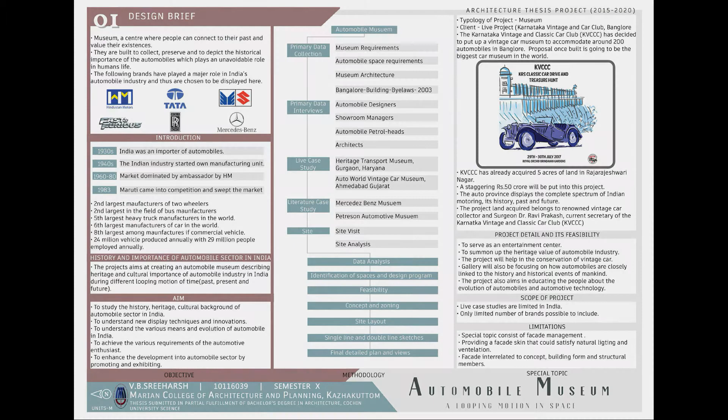Heritage Transport Museum, Haryana. The Heritage Transport Museum is located at Gurgaon, Haryana, in 3 acres of land. The building form consists of industrial era design.

Multiple levels were created at the ground level according to the site contour. The structural system is placed without obstructing views. The exposed column gives a feeling of the automobile industry.

Cutout slabs provided as a form of display technique and circulation. Electrical units are combined together for easy access. Outdoor HVAC units are placed on a raised plinth for dust and water resistance.

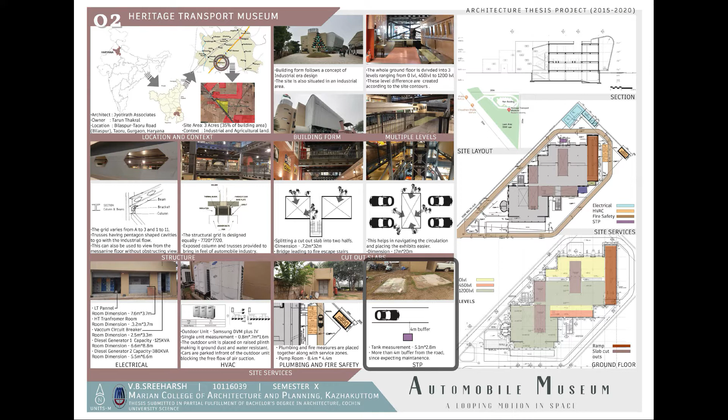Easy fire truck access to plumbing and fire escape room. The sewage treatment plant tank was placed 4 meters away from the service road for easy maintenance.

Here we can see different types of display techniques: parallel parking, 45-degree parking, mixed parking, floating island, and wheel cart exhibit.

The key factor in the museum is its circulation. There are some circulation movements that came to my notice in the museum.

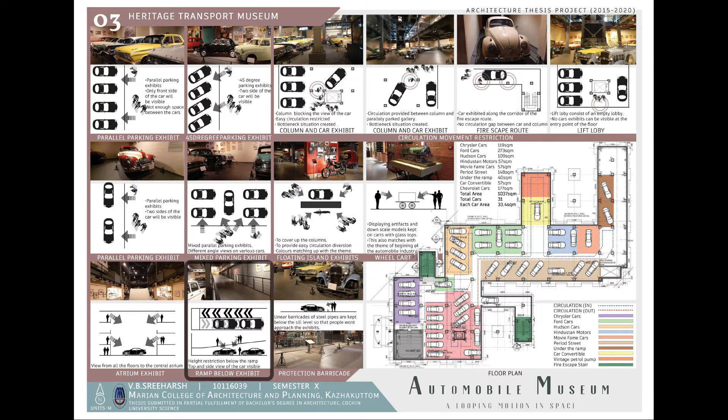Cutout slabs also helped in the formation of atrium spaces, thereby providing a bird's eye view of the exhibits. There is a height restriction below the ramp. Linear steel pipes are also provided as a protective barrier without blocking the view.

The total car display area is 1037 square meters, with an average of 33.4 square meters required for each car exhibit.

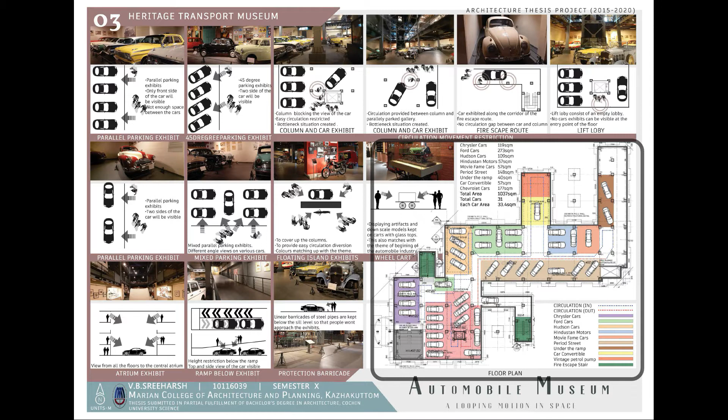Auto World Vintage Car Museum, Gujarat. It is located at Ahmedabad, Gujarat, in 3 acres of land.

There are main entry, secondary entry, and tertiary entry to the museum, which filter vehicular entry, parking, and visitor entry respectively. This 104-year-old fort was converted into a museum.

Aluminium roofing was added as a part of the conversion of the fort into a museum. Curtains are provided for shading, which block the view at the approach.

The display technique consists of 45-degree parking exhibits and mixed parking exhibits, which could only display either two sides of the car. The total car display area is 3,365 square meters, with an average of 37 square meters required for each car exhibit.

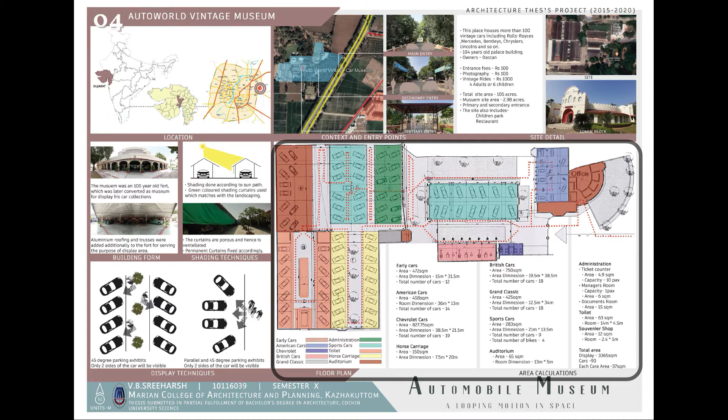Mercedes-Benz Museum, Germany. The Mercedes-Benz Museum is located at Stuttgart, Germany. The building form is based on the shape of Wankel engine components, which thus creates triangle atriums.

The display technique consists of centrifugal car display, which helps in viewing multiple cars from a single point of view, and display on ramps creating an ambience of the racetrack.

Vertical display on the wall where one can view the roof of the car, and finally, high-rise platforms suitable for central courtyard spaces.

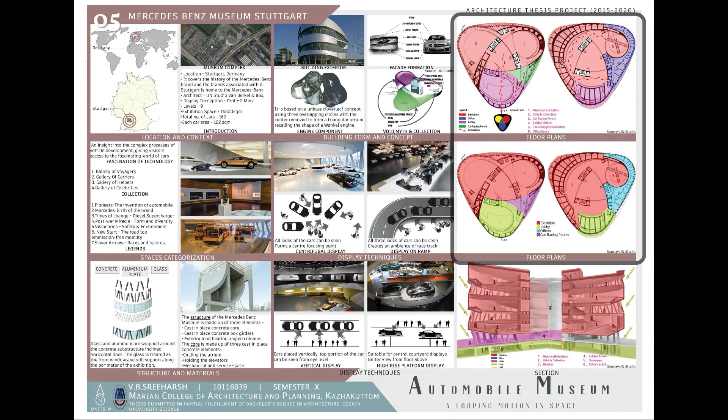Structure and materials include concrete, glass, and aluminum plates. The total car display area is 16,500 square meters, with an average of 102 square meters required for each car exhibit.

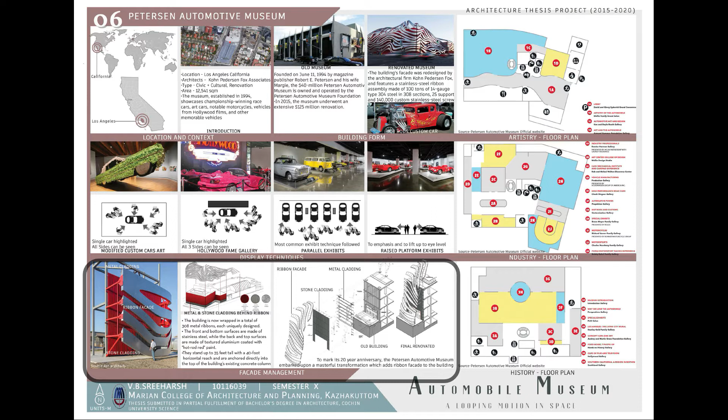As a part of the renovation, a ribbon facade followed by stone and metal claddings were added to the facade, which transformed the museum into a modern era museum.

Comparative analysis: a total of 4 case studies were conducted, 2 literature case studies and 2 live case studies. Two of the live case studies and the Petersen Museum share similar site areas of 3.4 acres of land.

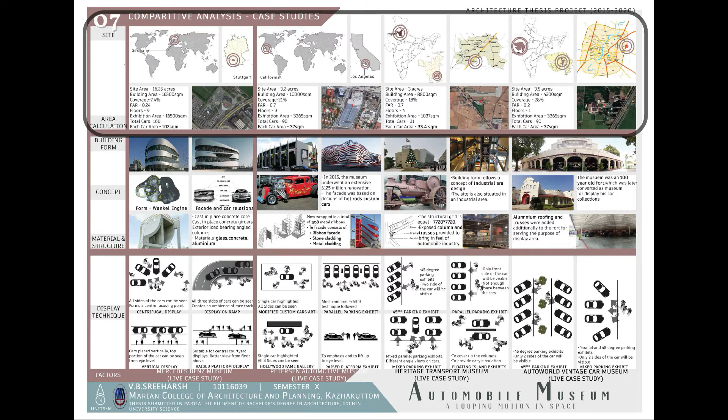An average of 38.3 square meters of area was identified for each car exhibited among all 4 case studies. The Mercedes-Benz Museum derived its concept from the Wankel engine component. The Petersen Museum facade was based on hot rod custom cars. The Heritage Museum follows the concept of the industrial era, and the Auto World Museum used to be a fort before.

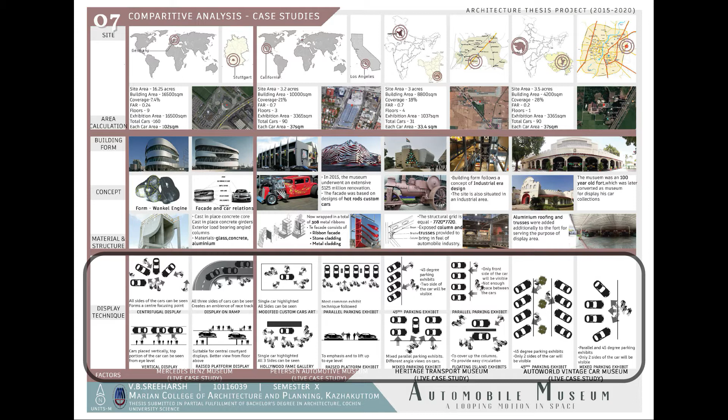In terms of building form, all 4 case studies depict different styles ranging from modern era architecture, facade renovation, industrial era, and forts. Considering materials and structure, all case studies have concrete, glass, steel, and aluminium as a common factor. While analyzing display techniques, custom cars, display arts, Hollywood fame gallery, display on a raised platform, and 45-degree parking exhibit with access to all 4 sides of the car were chosen.

Site context: the site is located at Rajarajeshwari Nagar in Nayandahalli, Bangalore. The land map depicts the location of the site in a residential zone, serving the advantage of visibility for the project. The growth map helps in understanding that there's more exposure to the project. The transportation network shows easy access to the site via metro, monorail, and interchanging points.

Site located near the Mysore Infrastructure Corridor Nice Road and Nandi Infrastructure Corridor Enterprise Road. Since the land use dynamic map shows a thick built-up zone at the site, the proposed museum building form should be unique. The population density map shows more than 1,000 persons per hectare, hence more visitors to the museum.

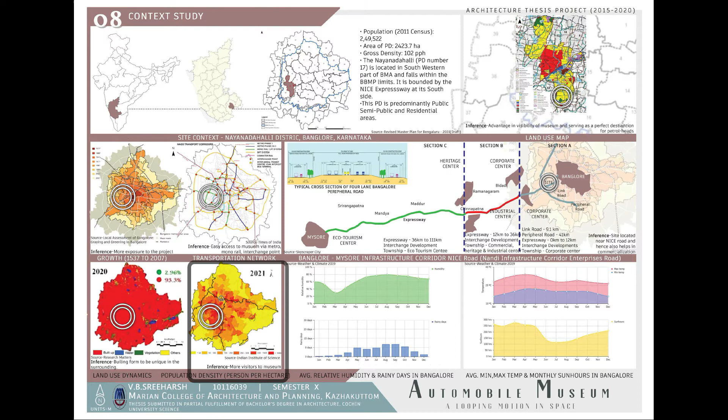Site analysis: from the site context, we can see that the site is located in a residential area with immediate access, 20 meters from the bus depot. It is only 1.5 km from the Nice Road Expressway and 800 meters from Uttarahalli Main Road, hence easy access for people coming from both Bangalore and Mysore. Access from the airport and railway stations are under a 50 km radius.

The site has thick vegetation of palm trees and abandoned poly houses which will be demolished and cleared. The stakeholder is Karnataka Vintage Car Collection Club Bangalore. It's a live project. The maximum permissible FAR is 1.25 with coverage of 45%. Setbacks are considered with the height of the building, thus 10 meters should be left for buildings above 27 meters and up to 30 meters.

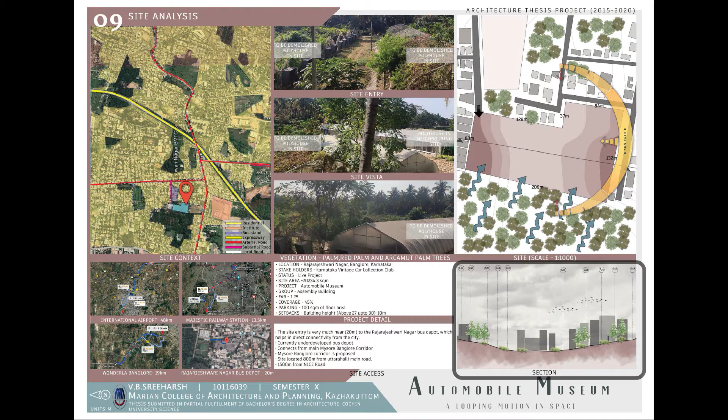There is only one entry point to the site, with natural ventilation from the west side without interference from buildings, providing airflow movement to the proposed museum. There is a gradual contour difference of 3 meters, shallow at the center of the site, which also determines the natural flow of water to the center.

Design concept: the concept of the museum begins with the looping motion of space, a motion through different eras of time such as past, present, and future timelines. These timelines are also related to the cars exhibited, such as vintage cars, present trends, and futuristic cars.

Introducing the infinity loop to the project, thereby relating it to time and space. This includes introducing an infinity loop to the building form and circulation, thus creating infinite movement through different timelines in the museum. The infinity looping structure is placed aligned with the elongated site. Alignment along the north is done considering the sun path and natural wind flow. The infinity loop hypothetically does not contain a starting and an ending point.

Practically, a common starting and ending point is provided with respect to entry and exit points in the project. The infinity circulation movement pattern is provided in light of infinity loops, having no repetition in circulation in the museum, thus proving a success in museum planning. The central courtyards create a micro-forest and a pond which helps in cooling the museum. Both central courtyards can be viewed from the ramps.

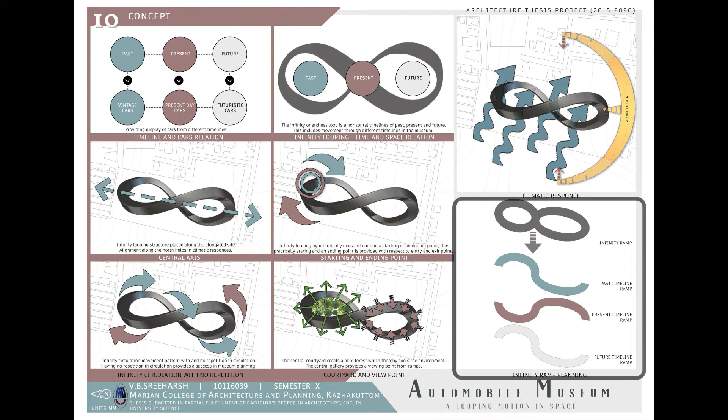The building is aligned according to climatic conditions so that maximum wind flow passes through it. The shorter side of the building, aligned to the south, minimizes the amount of sunlight falling on the building. The infinity ramp splits into past, present, and future timeline ramps.

Survey: a survey was conducted among 30 individuals from different automobile fields such as zonal managers, design crews, and auto enthusiast online crews, mainly focused on understanding the various requirements of automobile enthusiasts. Different categories of spaces were given with regard to the conclusion from the survey: vintage, futuristic, unique, exotic, and current trend cars to be exhibited at the museum. Overhead exhibits, wall hanging, and rotating display were chosen as car display techniques.

Both artificial and natural lighting are preferred for lighting conditions, with a fully air-conditioned museum preferred among other options. Among various functional spaces, the car customization space was selected. For providing automobile industry awareness, movie shows and display of 3D huge scale models were selected. R&D and souvenir shops are chosen among additional features to the museum, and a drive-in theatre was selected for family entertainment.

Zoning evolution: initially, the idea was to stack floors one above the other, with two different zones consisting of entry, core, cafe, and activities as the first set, and the second set consisting of vintage, present, and futuristic timeline display. This was very conventional and hence needed to be improved.

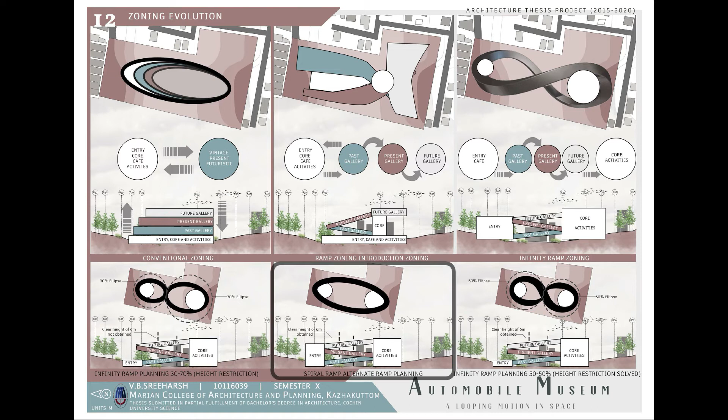A spiral ramp was planned to solve the height restriction at the intersection, and thus a clear height of 6 meters was obtained. The height restriction at the intersection was solved by dividing the ellipse equally.

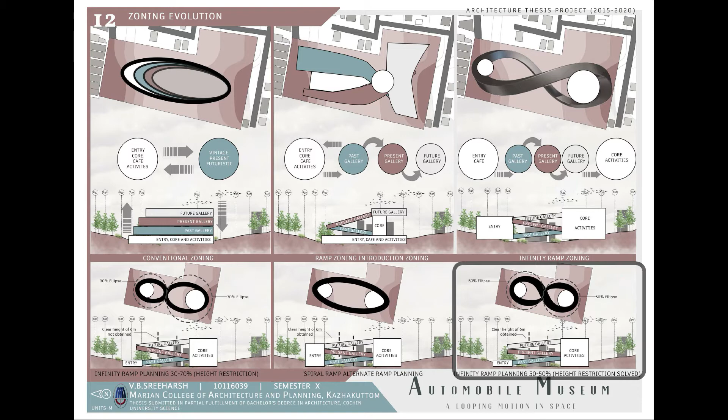Zoning and proximity: the entry point of the building is further categorized into reception, museum office, and cafe. A mini forest was created at the entrance courtyard. Display gallery ramps were placed along the direction of wind for natural ventilation, and the core building consists of the activities area and all the service units.

The drive-in theatre was placed considering the sun path. Infinity ramps connect two separate building units, with entry to the infinity ramp display from reception after experiencing all the gallery at ramps and activities at the core building, before reaching back to the cafe at the entry point, thereby completing the infinity loop.

Direct access from the ramps is provided. Visitors can have an informative experience that includes R&D and discovery centers, and kids can have fun while they are here. There is no visitor entry on the floor since the ramp does not connect with that particular floor; this whole floor is thus dedicated to staff and car warehouse.

The topmost floor contains a viewpoint and various other gathering spaces such as a banquet hall and cafe, so that visitors can take advantage of the view.

There are 3 different user groups at the museum. Museum visitors have access to ramp galleries, core and activities, cafes, and the mini forest. Drive-in theatre visitors can only access the drive-in theatre and cafe. All other entries to the museum are restricted.

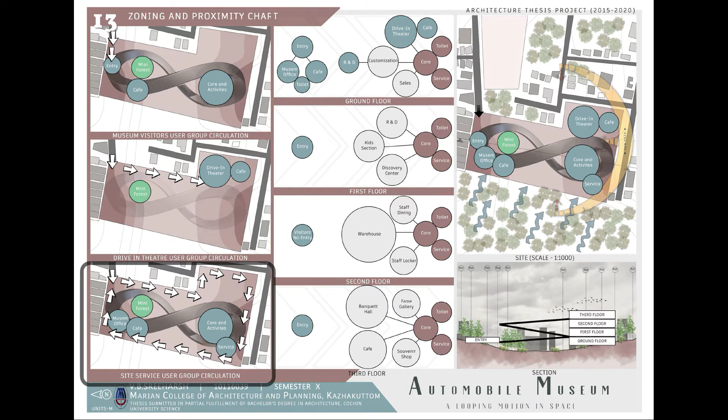Drive-in theatre functional hours are after museum hours, which also helps in avoiding further clashes. Site service user groups have access to every corner of the museum.

Design evolution: conventional museum planning with two separate three-story buildings, with three separate building blocks containing galleries and activity spaces. Two separate ramps containing galleries and activities, with functional spaces provided along the ramps.

Introducing the core and activities as a separate building, with two gallery ramps connected to the core building. Infinity ramp circulation was introduced with no repetition in circulation, but clear height was not obtained at the intersection of ramps.

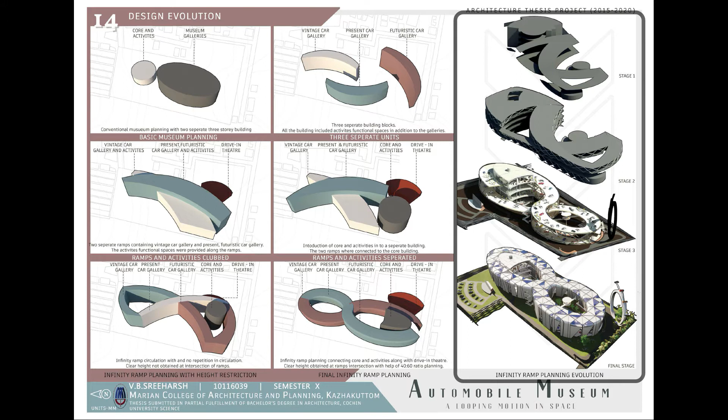Infinity ramps connecting core and activities along with the drive-in theatre. Clear height was obtained at the intersection with 40-60 ramp planning. This shows a glimpse of the different stages of the project.

Exploded view: I-section vertical columns support ramp beams at ground level. Three sets of I-section beams support ramps at different levels, ranging from 7 meters, 14 meters and 21 meters. A two-story basement parking includes mechanical and automated parking systems on each floor.

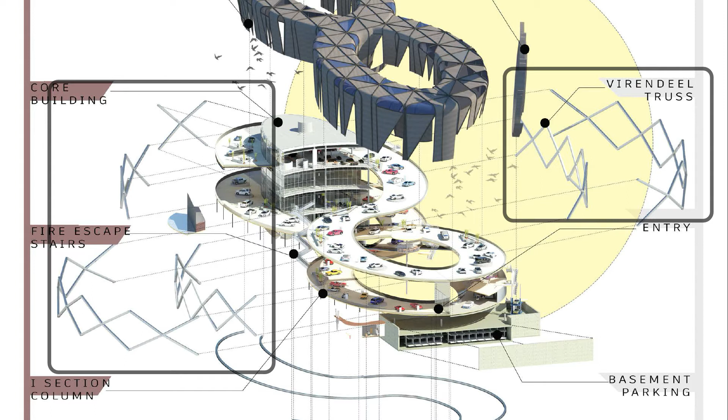Virendeel trusses are provided for supporting beams that are not in direct contact with the ground; these trusses also add to the aesthetics. The core building consists of activities and other services.

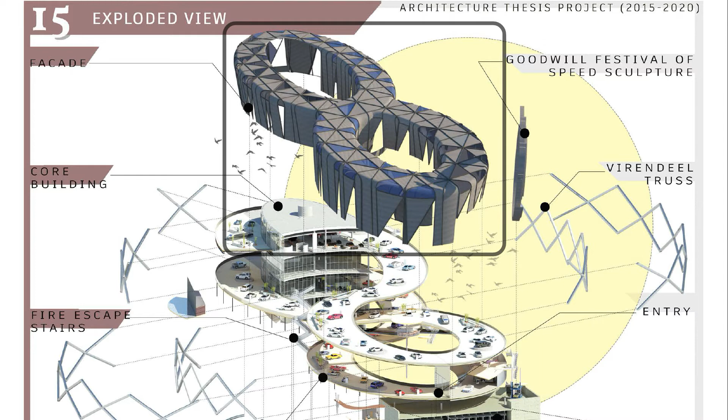An iconic sculpture of the Goodwill Festival of Speed is also constructed, which is also the highest point at the museum. This iconic structure pays tribute to all 5 brands displayed at the museum. The facade skin consists of white steel sheets, panels, steel frames, and polycarbonate sheets.

Site layout: the total site area is 5 acres, with a total built-up area of 12326 square meters, FAR of 0.59, and coverage of 26.8%. A total of 70 cars are displayed at the ramp with 124 square meters of display area for each car. The estimated time to cover the museum varies from 3.2 to 4 hours, with a total walking distance of 865 meters. A sub-arterial road leads directly to the site.

Security cabin placed at the entrance to help navigate museum and drive-in theatre visitors. Goodwill Festival of Speed iconic sculptures also placed as a tribute to all the 5 brands displayed at the museum.

Entry building blocks are placed at plus 3.2 meter level. A car lift is provided at the site for an automated parking system in the basement without disturbing the vehicular circulation of the site. Fire escape stairs also provide access to the basement parking.

A pond is placed at the lowest contour of the site, conserving the gradual flow of water. Bus parking slots are provided in the service road since it is not frequently used, thereby not interfering with the car circulation at the site.

The R&D workshop was placed at a level of 2 meters and gets a clear view from the ramp above. The core entrance building consists of car entrance and lifts to transport cars into ramp galleries.

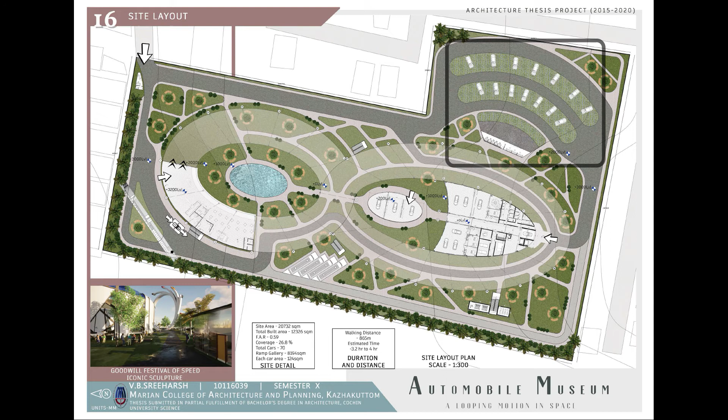Circulation: the vehicular circulation path of various groups can be seen here. Museum visitors do not have access to the service road and drive-in theatre. The road leads beneath the ramp, thereby passing through several gathering spots.

A dedicated road network is provided for the drive-in theatre. All the roads are 2-lane roads for easy circulation. Museum service personnel have access to every road at the site.

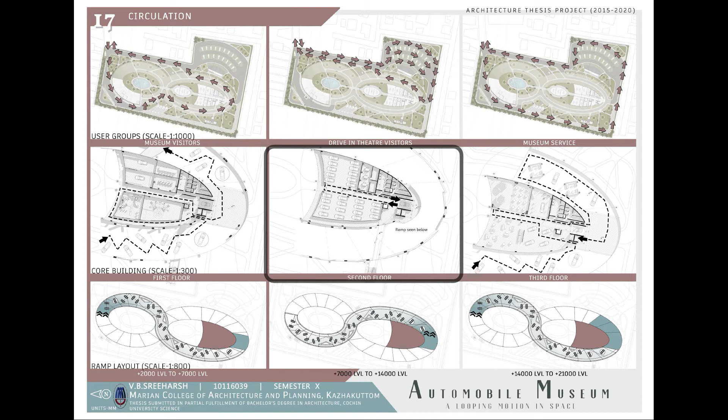The first and third floors have ramp connections, and hence the core building acts as a transition space between ramps. In the case of the second floor, there is no connection with the ramp, and hence the only access is through a lift, dedicated to staff and the warehouse alone.

Circulation in the ramp at different levels is shown here. The circulation between exhibits also forms an infinity looping shape. Cars are placed in such a way that all 4 sides of the car can be viewed.

Some of the cars are also placed on a raised rotating disc. Seating spaces are also provided throughout the ramps.

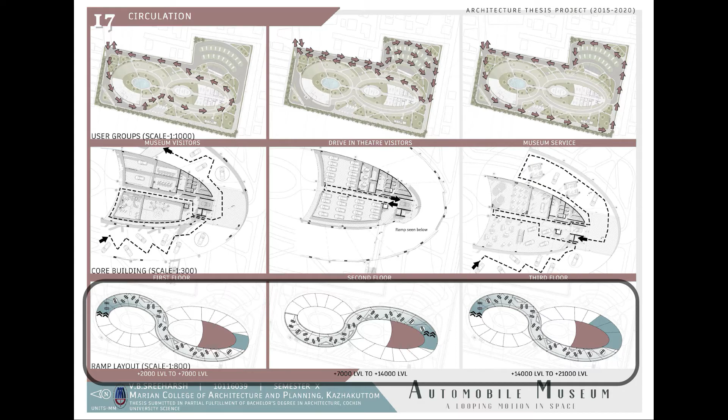Services: the HVAC room is placed outside the core building for easy air intake and for easy access by service personnel. An HVAC duct is also provided connecting all the floors.

Fire stairs are placed at every 30-meter interval. The fire duct is placed near the plumbing duct.

Fire truck access is provided around the building with a road width of 6 meters. The pump room is placed along the service road for easy access to the fire truck.

Smoke detectors, sprinklers, and fire hydrants were used in the museum. A dedicated electrical duct is provided with access.

All the electrical services such as LT panel, HT transformer, vacuum circuit breaker, and generator are zoned together. Dedicated ducts are provided for fire, plumbing, HVAC, and electrical, all with service access to the duct for maintenance.

The plumbing and fire duct are placed 6 meters away from the electrical duct. The electrical and plumbing ducts measure 2.5 meter by 2 meter and 2.5 meter by 1.2 meter respectively.

4 bus parking spaces are provided on the site, and 120 car parking spaces are provided in the basement.

The pond and seating areas around the pond in the mini forest courtyard provide for ambient temperature and serve as a gathering area. The triangle landscaping is inspired from Vierendeel trusses in the building.

The drive-in theatre along with the cafe is also designed as a part of the landscape. The STP tank is placed at the lowest contour, which is at the center of the site, considering natural flow.

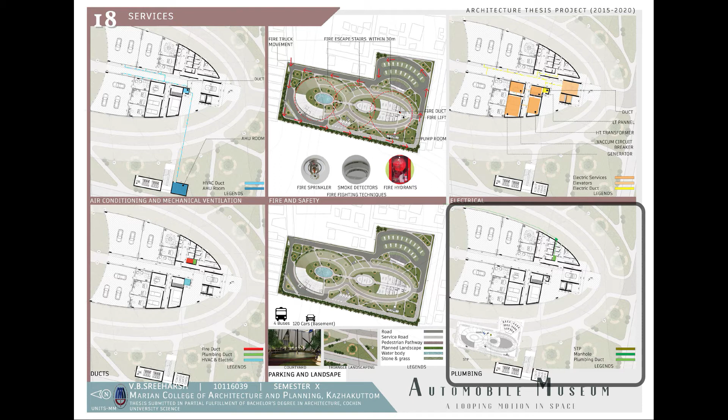The plumbing duct connects with the manhole at the exterior of the building, which then connects to the STP.

Parking: total parking was provided for 120 cars in the basement. 60 of these cars are dedicated to valet parking and placed at minus 2.5 meter level. The other 60 cars are parked using an automated parking system.

A fully automated car parking system, also known as FACPS, is a type of puzzle automated parking system. All references for this parking are based on KLAUS Germany multi-parking systems. The main elements of the system are lifters, shuttle, car pallet, and entry room.

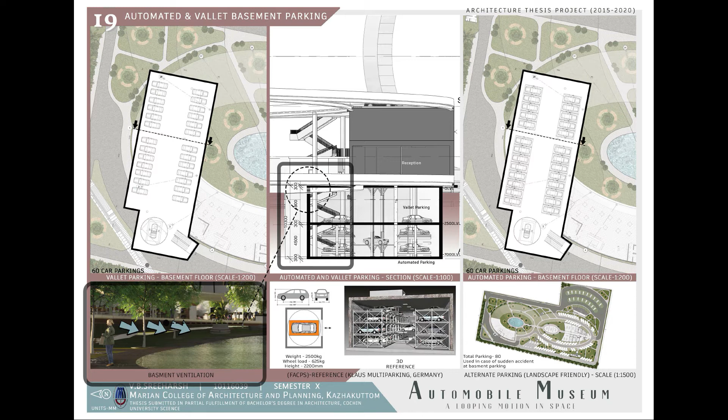A car lift with a rotating disc is placed along with the circulation road for better convenience. Fire escape stairs have access to both levels in the basement. Ventilation grills are provided in the basement which open into the courtyard as shown here.

Ground floor plan: a dedicated entrance gate and security cabin are provided at the site entrance. Entry into the building is welcomed by a reception of 333 square meters of area. The lounge is also flanked with a baggage scanner and locker room.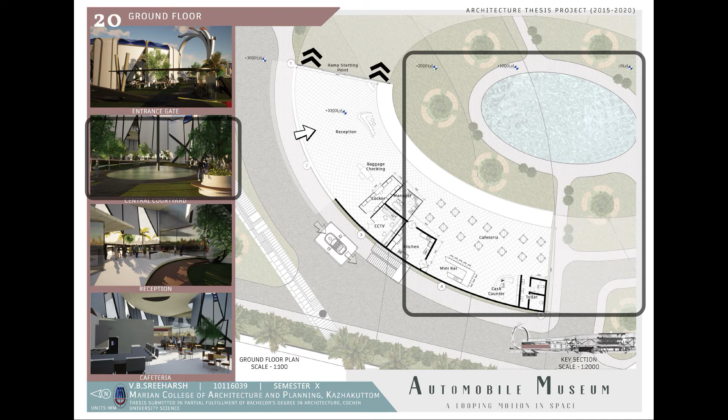The manager's cabin and CCTV room are placed along with the reception. The cafe and courtyards are accessible after completing the whole museum visit, since the starting and ending points here are the same. Core entrance floor plan.

The R&D workshop is placed in the courtyard so that people get an aerial view inside the department from ramps without entering in. The drive-in theatre is placed 20 meters away from the core building.

The car customization area is categorized into a painting studio, workshop, lounge, manager's cabin, and design studio. Hence, automobile enthusiasts who want their car customized can also visit the museum.

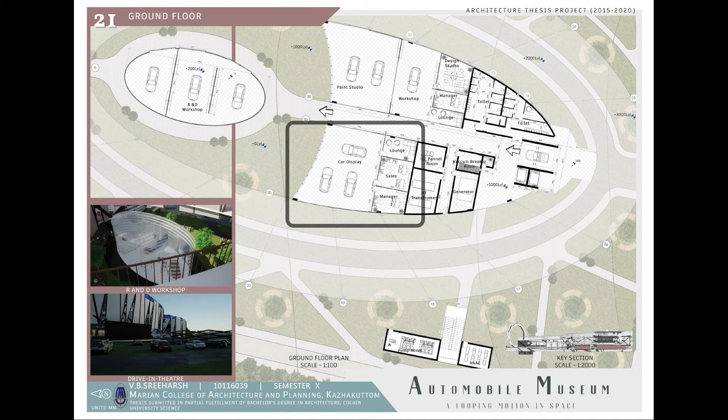The 5 brands chosen for display at the museum can set up their sales showroom on a 6-month rotation basis. The car sales showroom is categorized into a launch area, sales, manager, and a car display.

First floor plan. The first floor is at 7 meters, with a ramp approaching the floor from 3 meters and leading to 14 meters. The R&D units consist of clay modeling, ergonomic studio, a conference room, and a design studio.

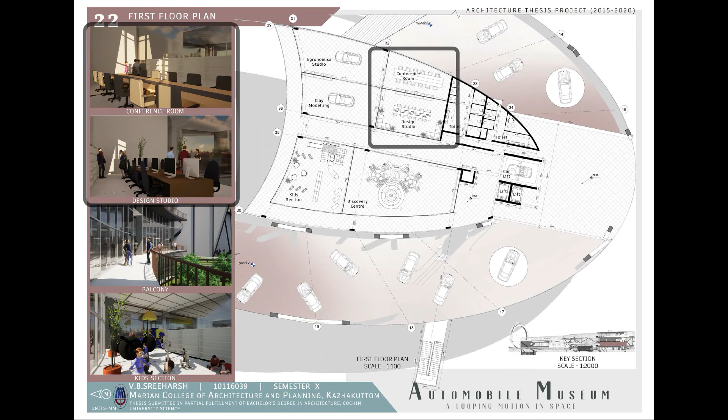Visitors have access to both the clay modeling and ergonomics studio. Movement is restricted inside the design studio and conference room.

The Discovery Center displays an upscale model of an engine with the aim of educating visitors. The kids section is equipped with toys and slides, keeping them engaged while elders are visiting the R&D and Discovery Center.

The second floor is at 14 meters. There are no ramp connections to the second floor. The whole floor is dedicated to staff and the warehouse. There is no entry for visitors on the second floor. Common dining and a dedicated locker room are provided for staff.

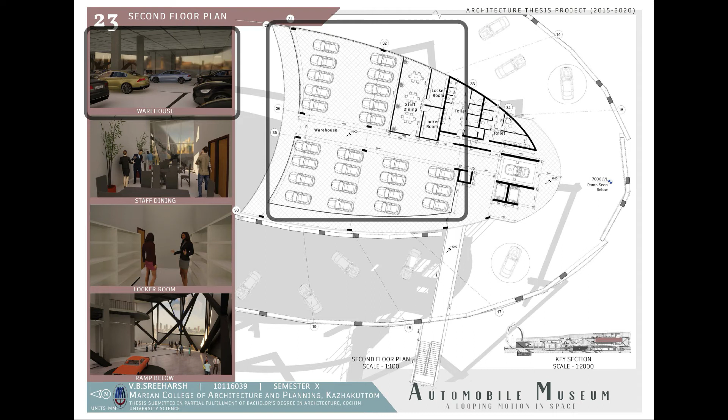The warehouse has a 25-car capacity. Cars can be changed without disturbing other cars. Ramps can be seen below. Third floor plan.

The third floor is at 21 meters, with a ramp approaching the floor from 14 meters and maintaining 21 meters after reaching the core. Being the topmost floor, the spaces are zoned according to views.

Two luxury cars are accessible to sit in and enjoy the view from the viewpoint. Banquet halls have retractable partition walls so they can be combined to create a larger space for meetings. Other facilities include the Fame Gallery and Cafe.

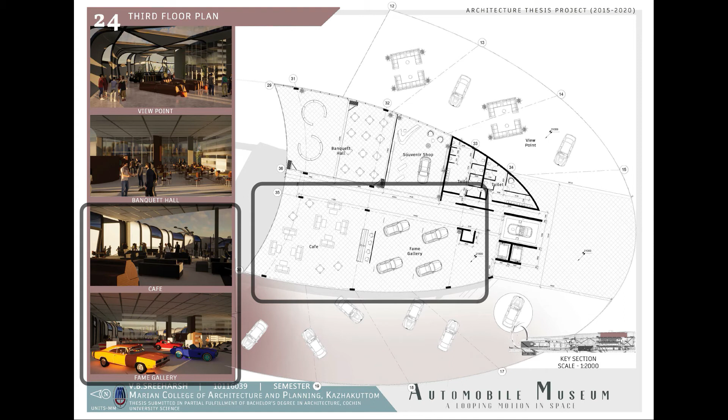Beam layout and false ceiling. The ground and second floor plans have similar beam layouts. The beam layout at the first and third floors are similar since they have ramp connections.

The longer side of the beam measures 51 meters and the wider portion measures 29 meters. The beam grid varies from 5.5 meters by 5.5 meters to 7 meters by 7 meters.

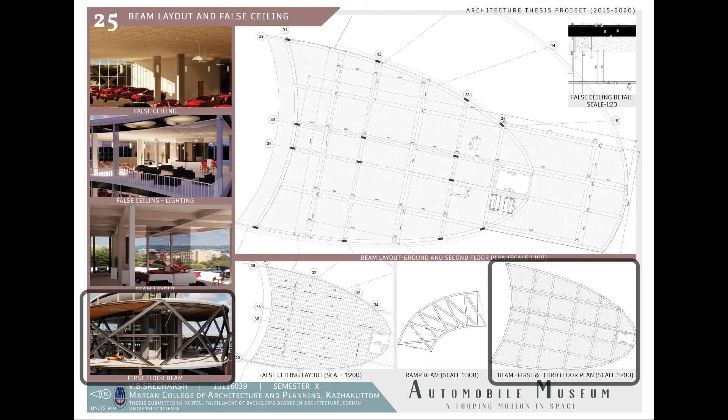The longer side of the beam measures 38 meters and the wider portion measures 29 meters. The beam grids are similar to other beam layouts. A false ceiling is done with a depth of 1 meter from the beams.

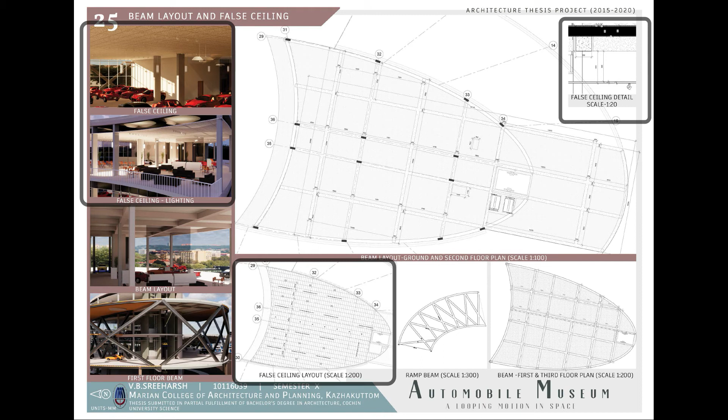There are track lights and spotlights provided for museum lighting. The ramp beam layout consists of I-section beams with a width of 15 meters. The diagonal beam areas also provide supporting for the ramp.

Section AA provides the longer side of the project. The highest point in the museum is at 40 meters, which is the tip of the Goodwood Festival of Speed iconic sculptures. The lowest portion of the basement is at 7 meters below ground level.

Section CC provides the shorter side of the project. The higher point of the building is at 28 meters.

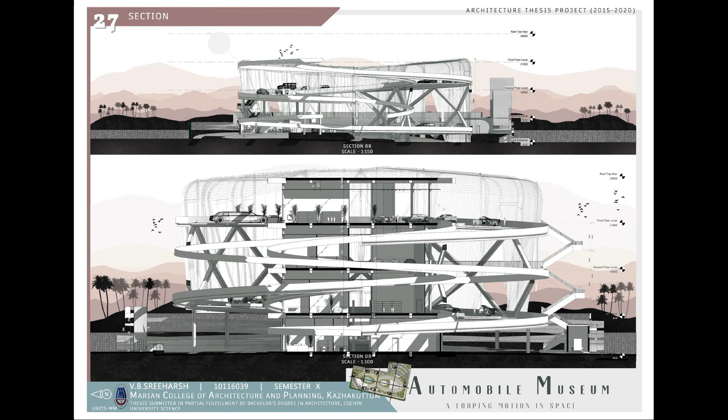Section BB provides the shorter side of the project. The higher point of the building at this end is at 21 meters. Fire escape stairs connecting all three floors can be seen in the section.

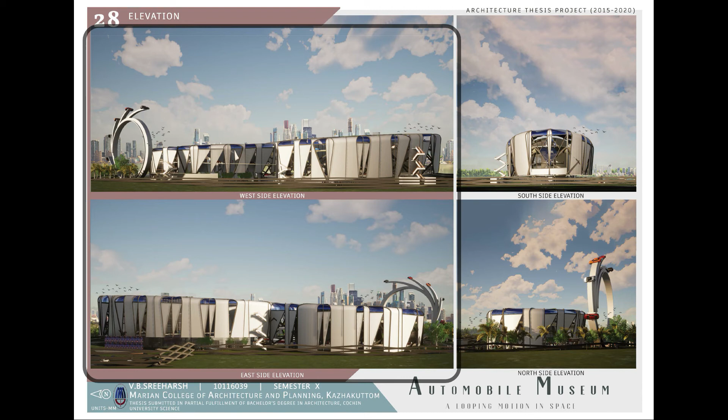Elevations. East and west side elevations are the longer sides. North and south side elevations are the shorter sides.

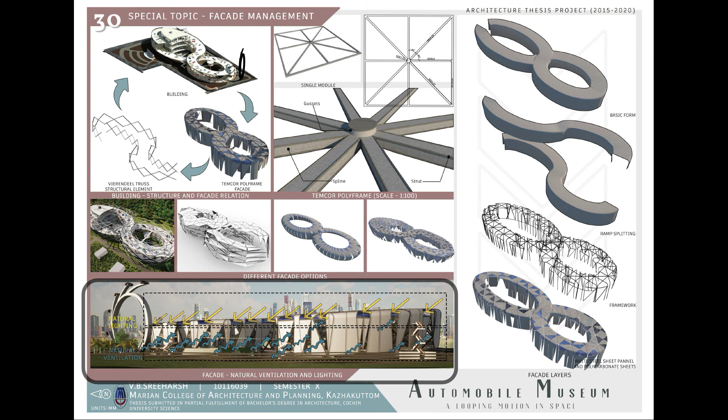Natural lighting from the roof consists of translucent polycarbonate sheets, which are structurally strong, cost-effective and have high thermal insulation compared to glass. Fins are provided on the longer side of the site according to the wind direction.

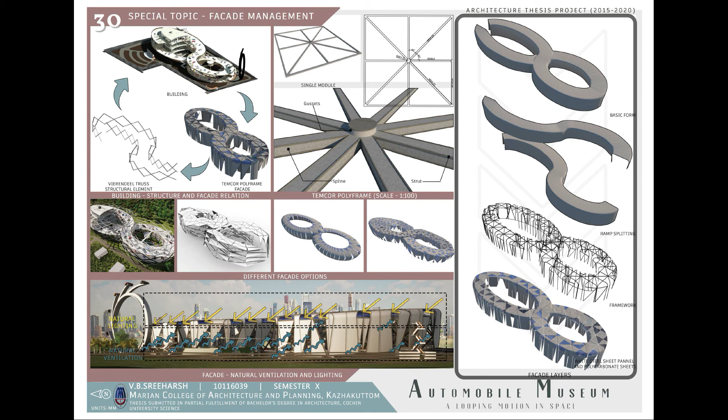This helps in cooling the interior. Facade layers show the different stages from basic form to the final facade skin.